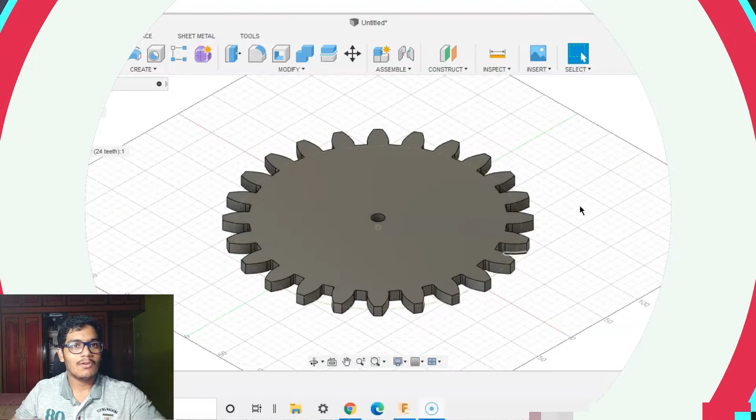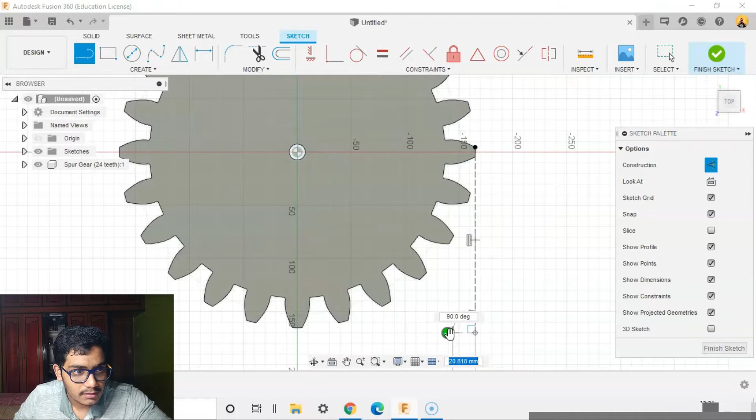So let's get started. I have a spur gear here. I will make a point. I'll create a sketch on the gear, make two construction lines for the axis of the tool. The point is made. Now I'll turn off my construction lines, go to point, and put a point here. I'll say finish sketch.

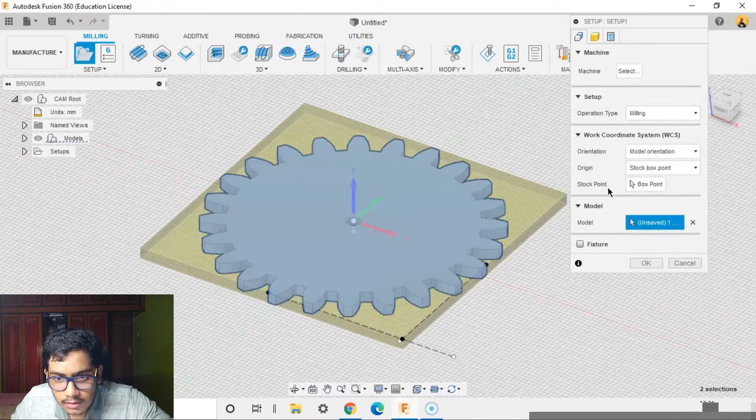Go to my manufacturing workspace. I'll make a new setup. The body will be this model. I'll go to my stock point, which will be a selected point. Select the point which I created just now.

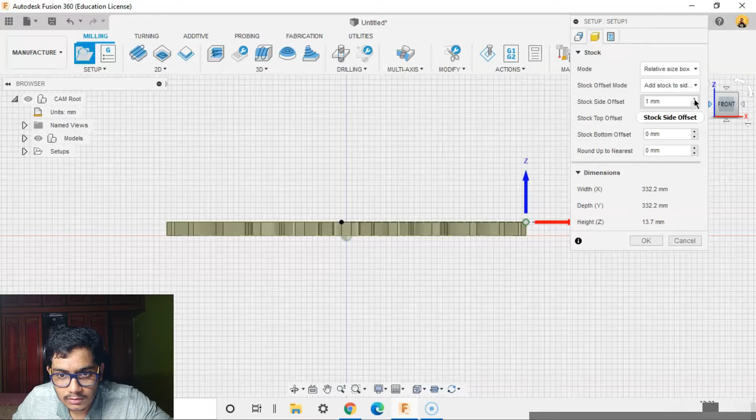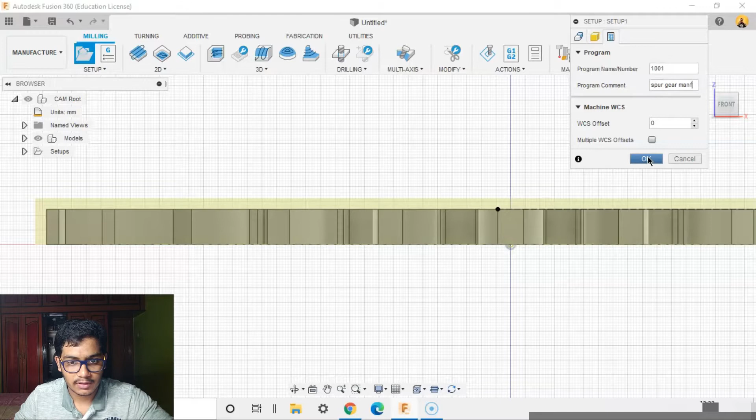Operation type will be milling. Go to the stock. Let's make the stock on the sides as well as top a little more - you can see it's increasing here. Make it 4 mm, and top again 4 mm. I'll write the program comment as spur gear manufacture. I'll say OK. Once our setup is complete, let's make all the tools.

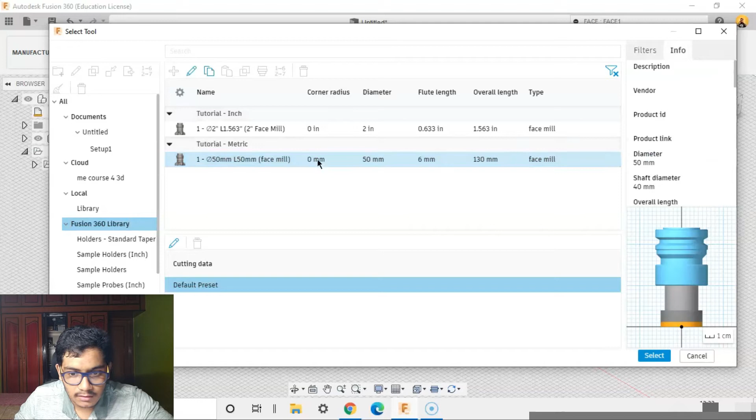First I'll do a face. The tool that I'll select will be a facing tool. I'll go to milling, go to the face mill, go to my Fusion 360 library - you can see that you can have it in metric. Select. Then go to geometry - you don't need to select any geometry here, it will automatically cut out all the required passes. Click, okay.

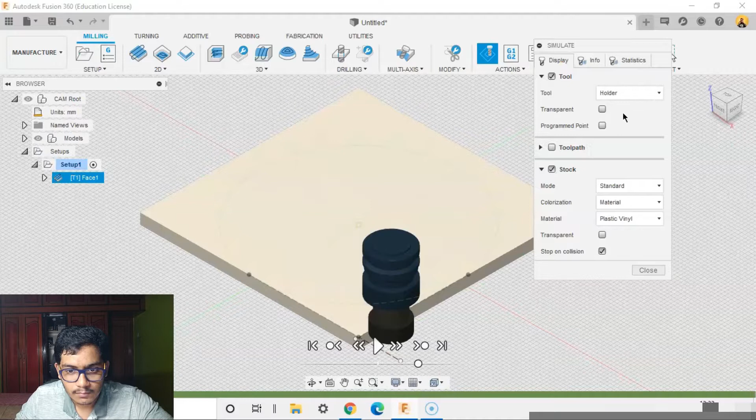Just animate and see how this will look. Yeah, the simulation looks good.

I'll close. After my face, I'll make a 2D adaptive clearing. I'll use a flat end mill here. Go to milling, I'll go to flat end mill, go to diameter, go to Fusion 360 library. Diameter equal to 5 mm, aluminum slotting. Select OK.

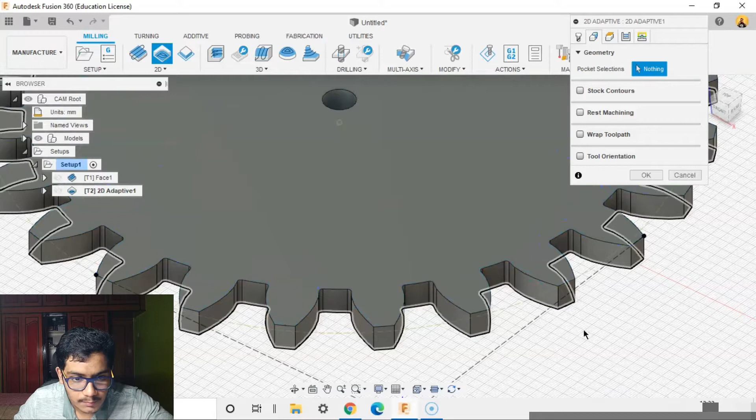After selecting the tool, we'll go to my geometry. The geometry I'll select will be the down edge. Go to my heights, I'll make sure that model bottom is a little bit down, -2, so that it clears everything. Linking - I won't do anything here, I'll leave it as default. I'll press OK. Okay.

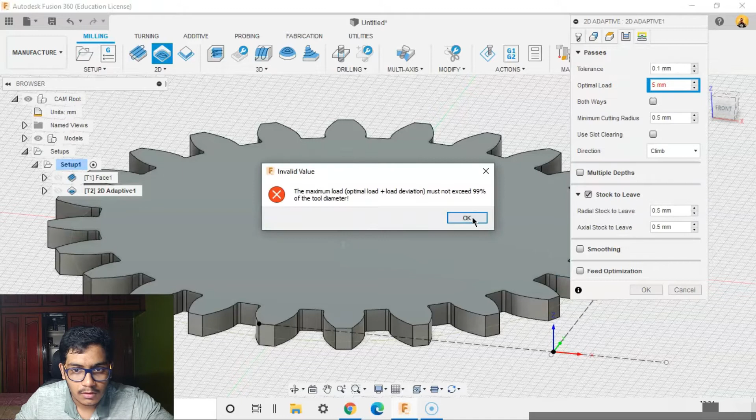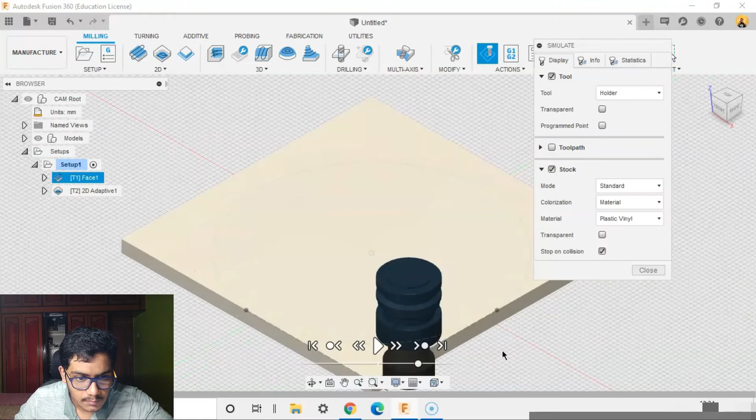Do it as 4 mm. Okay, go to my home view. Let's see how this turns out to be. Toolpath is generated, go to simulate. You can see that many parts are still remaining here.

So we'll do a 2D contour. I'll make a custom tool for this. First I'll go to milling, go to the flat end mill. I'll set diameter as around equal to 4 mm.

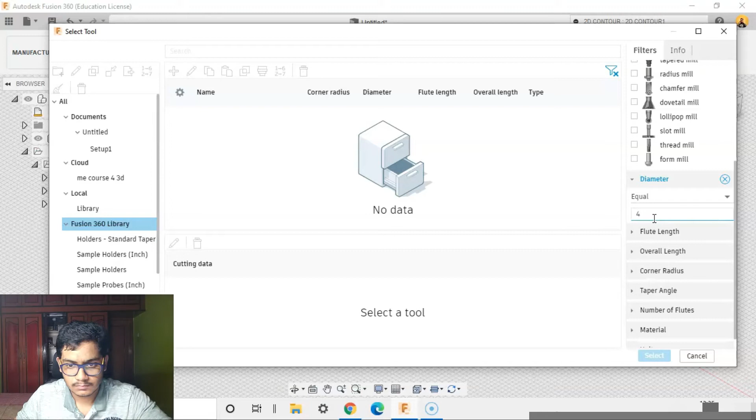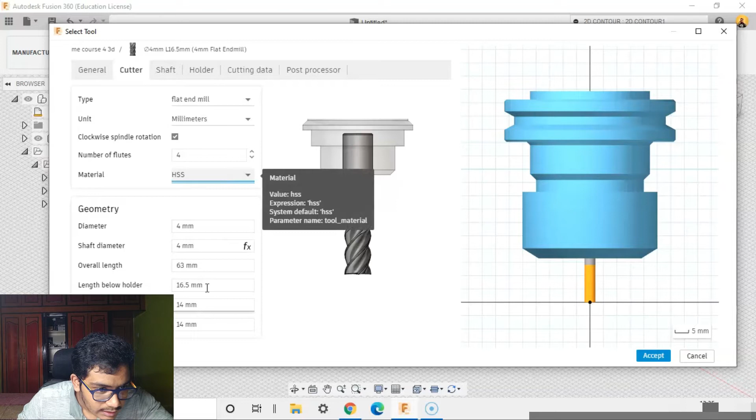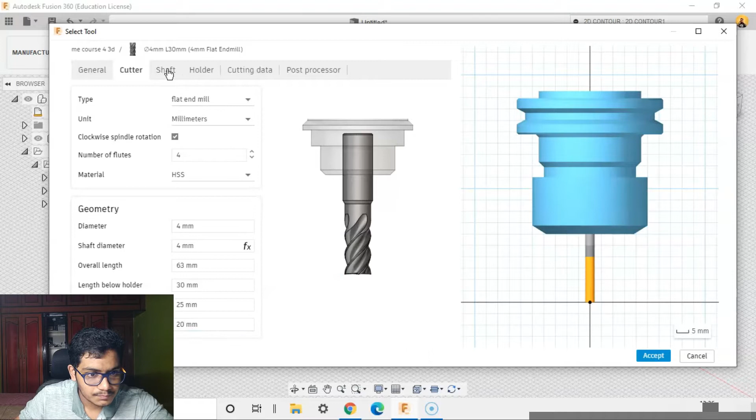I'll copy the tool, go to my cloud setup, and paste it here. This one I'll again edit - go to the cutter, increase the number of flutes, high speed steel material. I'll just increase the length - put the length below holder as around 30. Shoulder length is 25 and flute length as 20. Reduce the spindle speed to 10,000 rpm because we are focusing on the side edges.

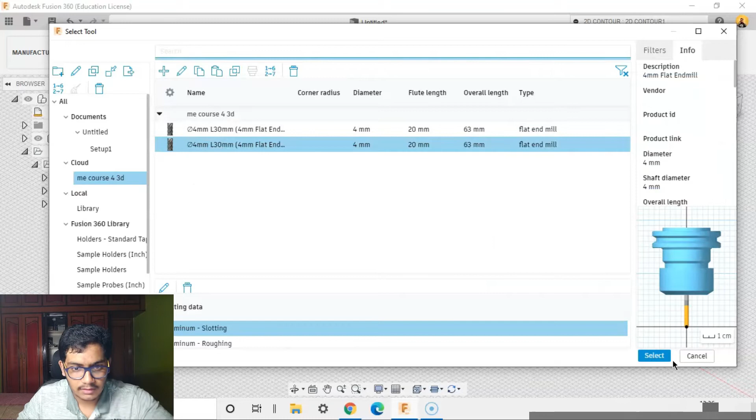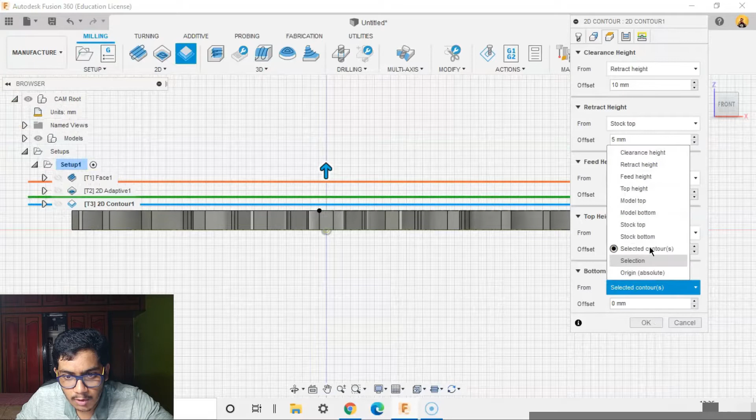I'll say accept and select this. Once you select the tool, I'll go to the geometry - again, contour selection will be the down, same edge. Go to my heights - again, I'll choose the model bottom and decrease 1 mm. I won't be doing anything here, I'll leave it as default. I'll say OK, so I'll let it generate the tool path.

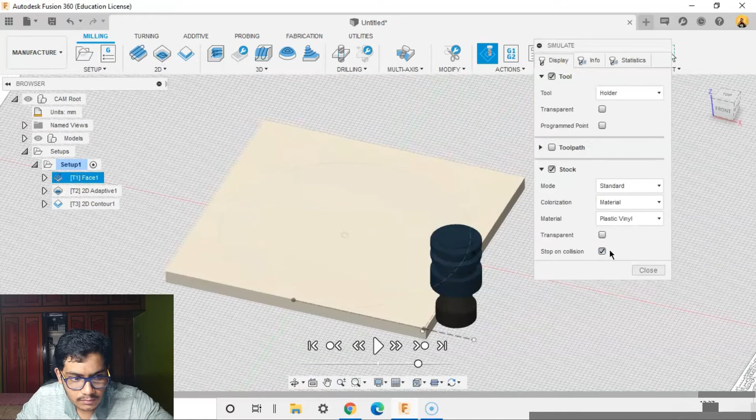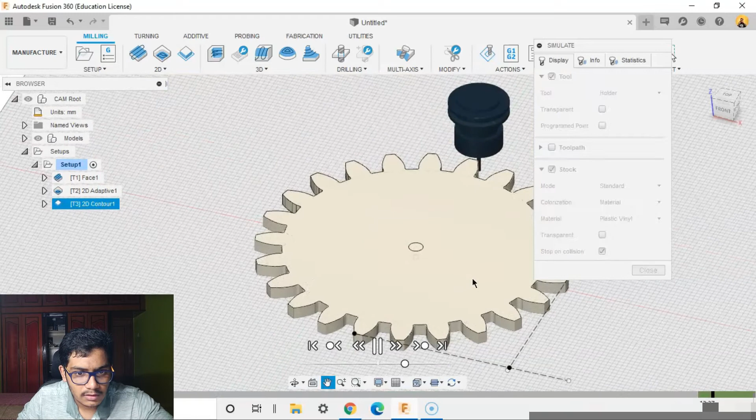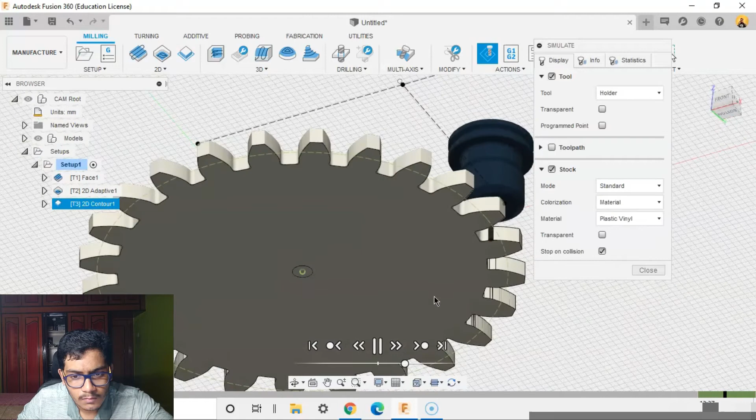We'll see how this works out. Now just go to actions and simulate. This is our adaptive. This is our contour - let's see if it will take all the parts. Yeah, it's doing a good job here, trimming all the required material. Stay close - we don't have any collisions.

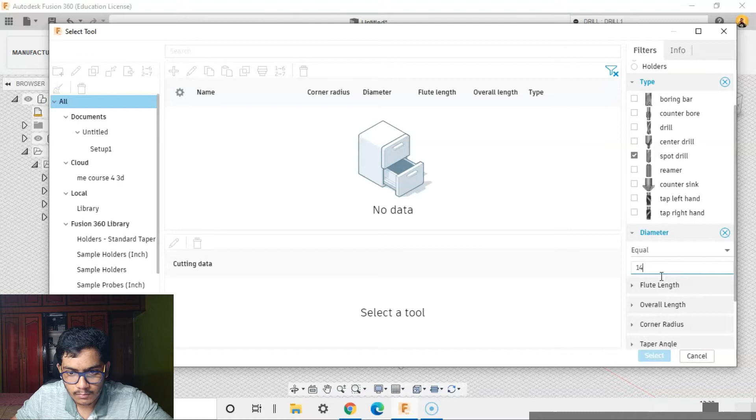So I'll focus on the hole here. I'll go to drilling, select a tool, go to hole making. I'll select spot drill first of diameter around equal to 14 mm. Have one - the aluminium drilling. I'll say finish.

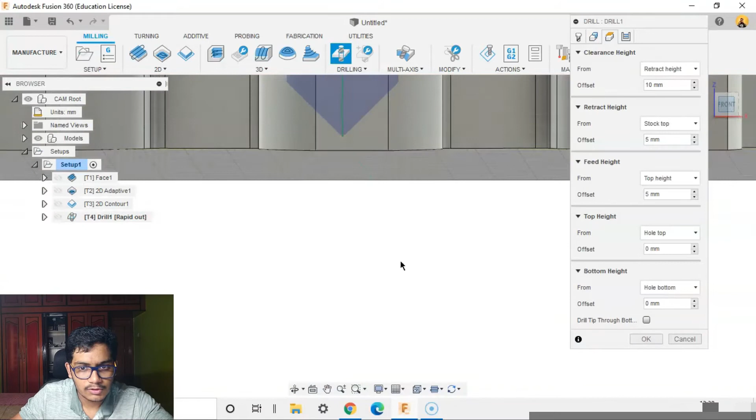Geometry - hole faces will be this one. Heights, go to the front view - that looks like a good height. I won't change anything here. Cycle drilling rapid, okay. Go to inspect and see that this was 15 mm, so I did a 14 mm spot drill.

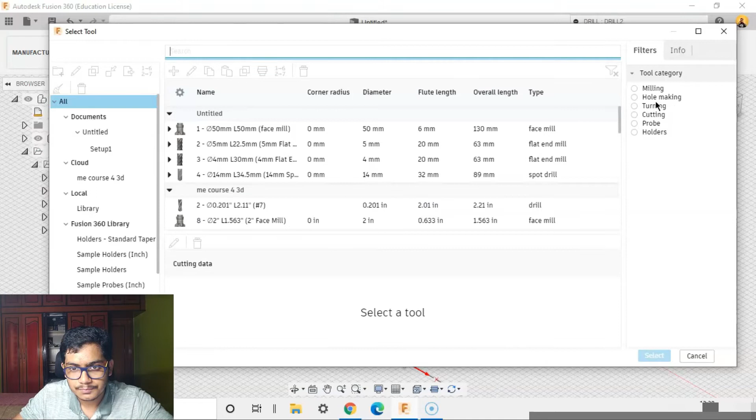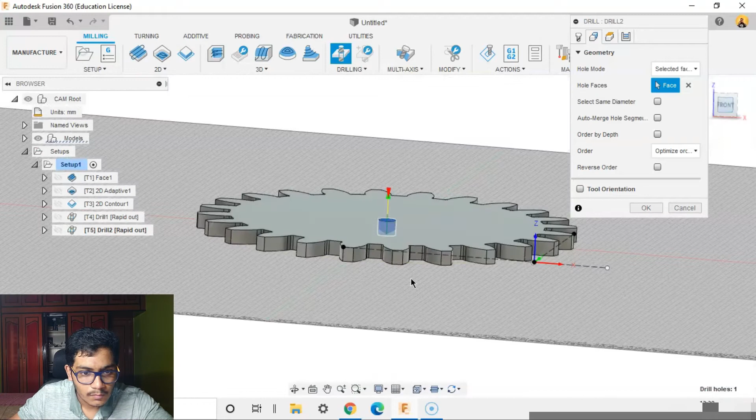Let's make another drill - this time I'll select a drill. Diameter will be equal 15. We have one aluminium drilling, I'll select it. Go to geometry, I'll select this hole face. I'll go to the front view - make sure that the heights here is offsetted completely. Okay.

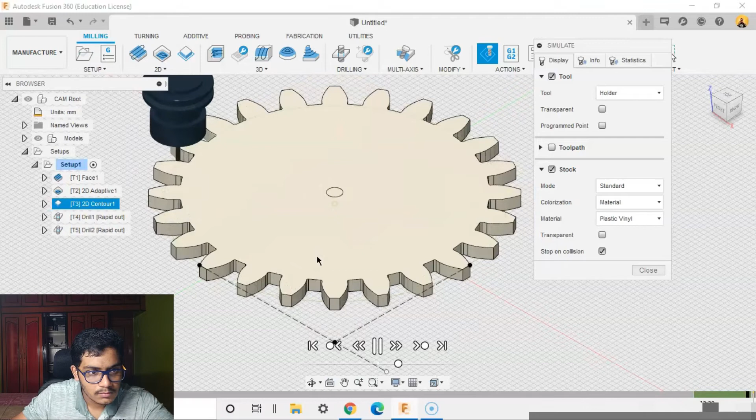So let's see the simulation here. I'll play it here. You can see that it's still there - it's not finished properly, so we'll do a proper finish.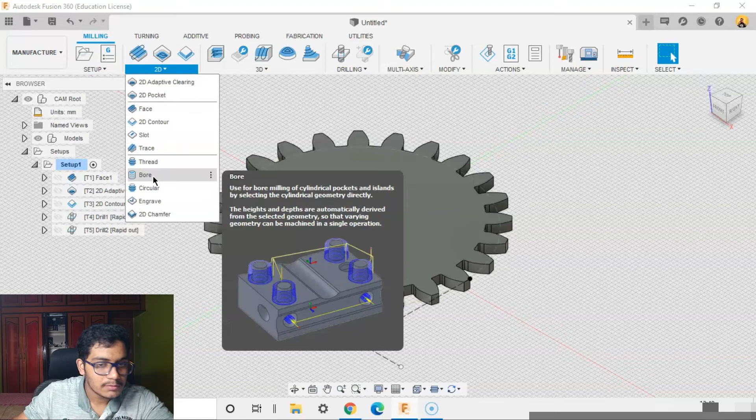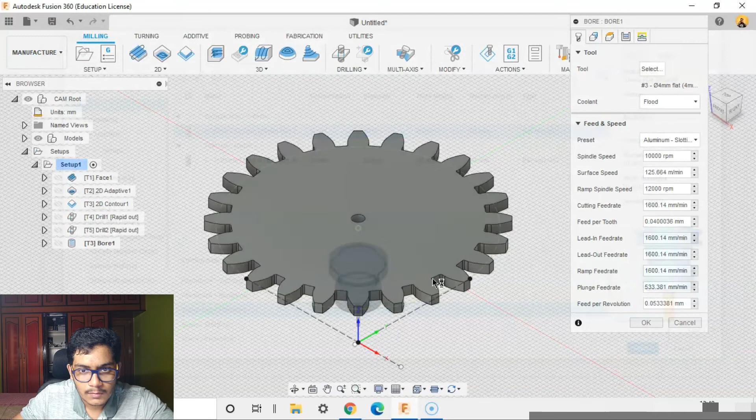Go to the home view, go to 2D and 2D bore. I'll select a flat end mill here. Diameter around equal to 4. We have one aluminium finishing. I'll select and go to the tool face - this will be my cross section.

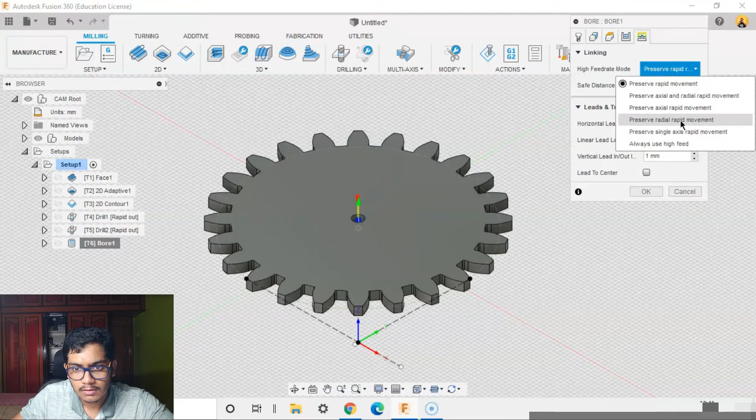Go to the heights and see how high. Let's take it a bit more down - so bottom height I will set negative, say around -3, so that the finish happens properly. This will again be a drill 2 - I'll make it as chip breaking, partial retract, and say okay.

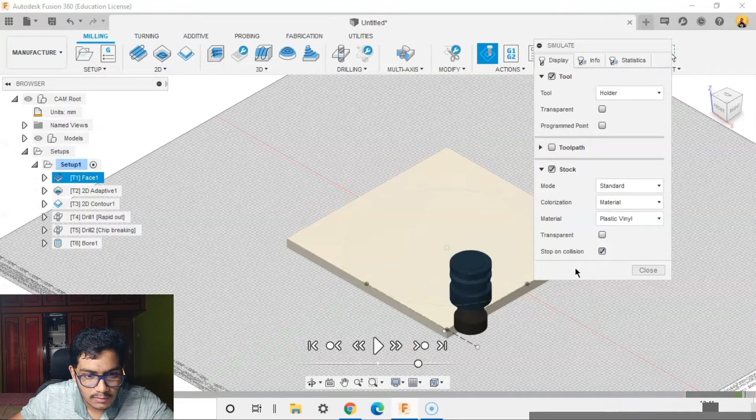So we're done with the bore. Let's simulate. We don't have any collisions - looks good. This is face here.

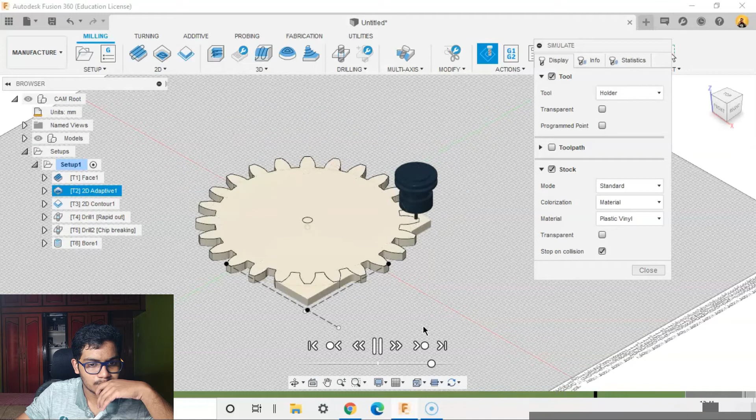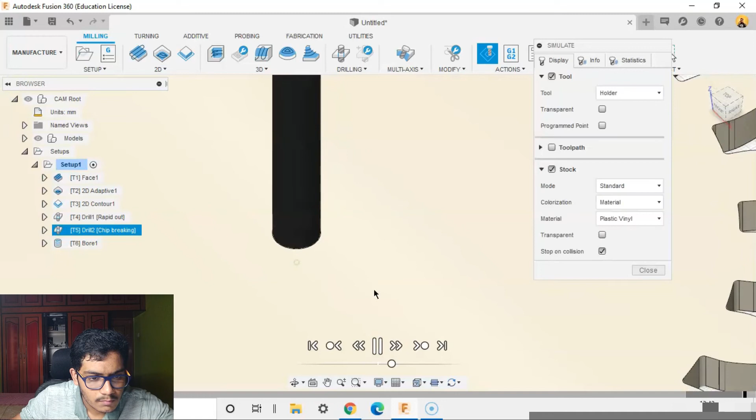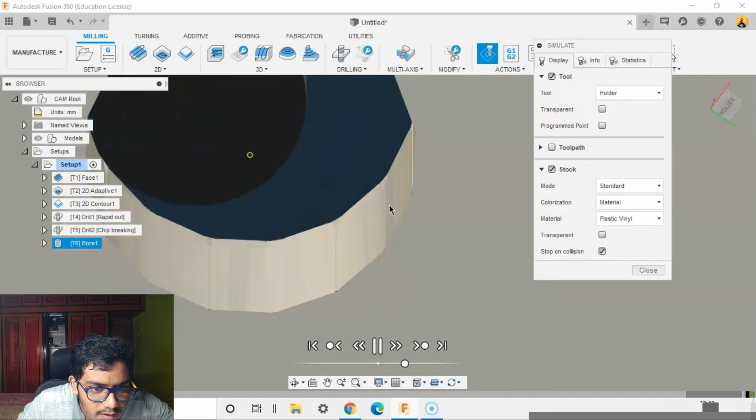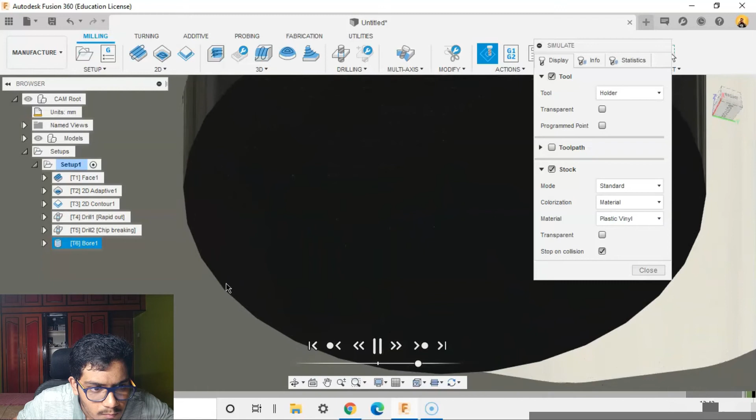This is the 2D contour, which gives a perfect finishing. Let's go back here a bit and see how this takes place - this is the slot, spot drilling. Now we have the drill tool. Let's see how the bore tool finishes here - it's giving us a good finish. This is a better finish.

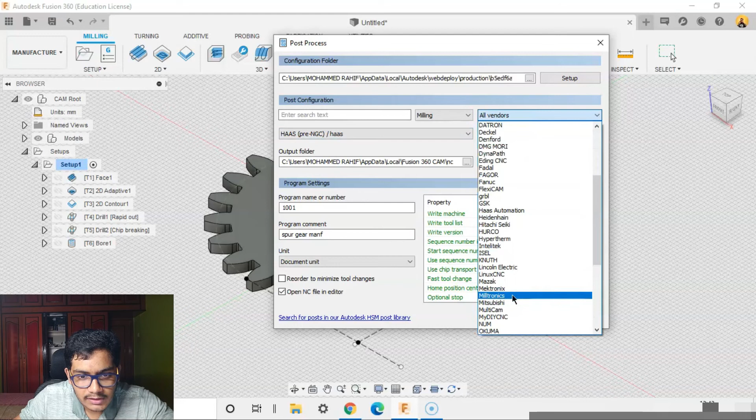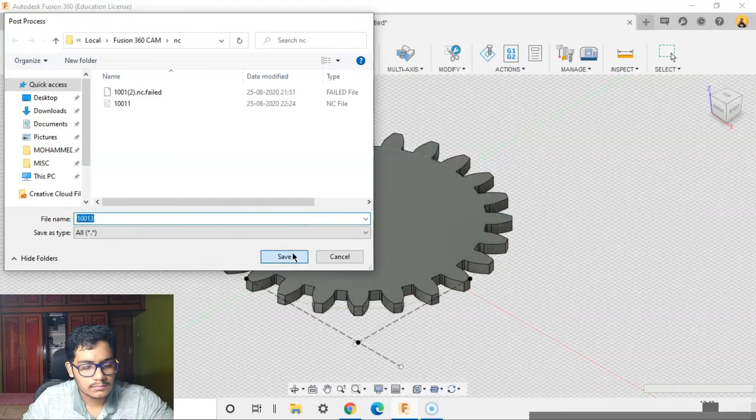We'll close. Now to generate our G code, I'll go to post process. I'll select the milling operation, go to my vendor selection - you can select any vendor. I'll choose Haas automation. The machine I'll choose Haas pre-NGC. I'll say post, and I'll name it as 1001. You can see that the file has opened in Visual Studio Code here - if you have MS Word, it might open in that also. You can see the tool used here: tool 1 face mill, tool 2 flat end mill, tool 6 flat end mill again, tool 5 drill. G54 means the axis, and this is the program for our NC file.

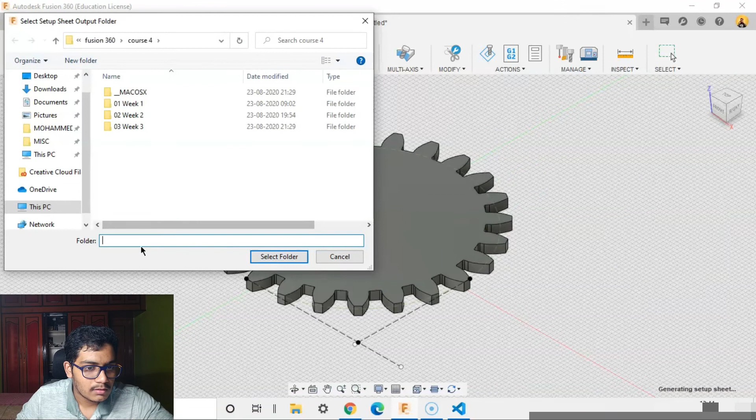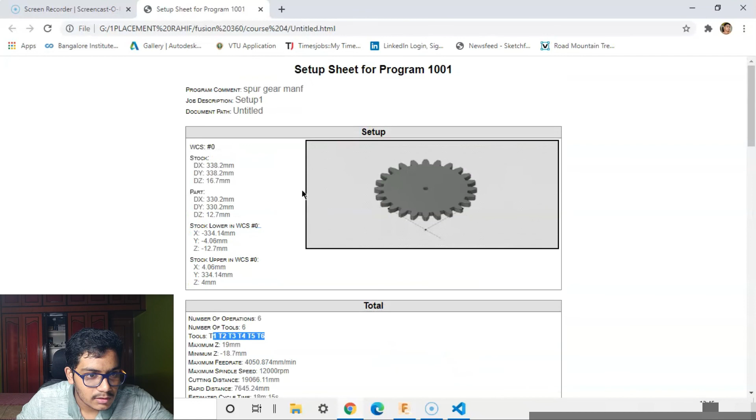I'll minimize this, and now for our setup sheet, I'll press setup sheet. I'll select this folder. It will take you to an HTML document. Here again, you'll get all the required information for your NC process: the number of operations, the number of tools required, the stock dimensions, and everything. I minimize this.